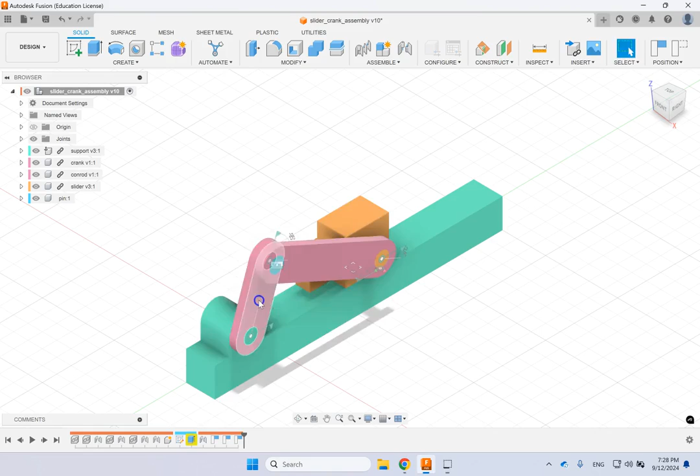Hello everyone. In this video we are going to look at assembly in Fusion 360, and to demo that I have chosen a slider crank mechanism here. This is the crank, that is the conrod, that's the slider, and this green member is the support, and I have created a pin afterwards, and this is the motion of this mechanism as you expect.

So clearly the crank is capable of spinning 360. The conrod spins and moves, and the slider only has one motion along the y-axis.

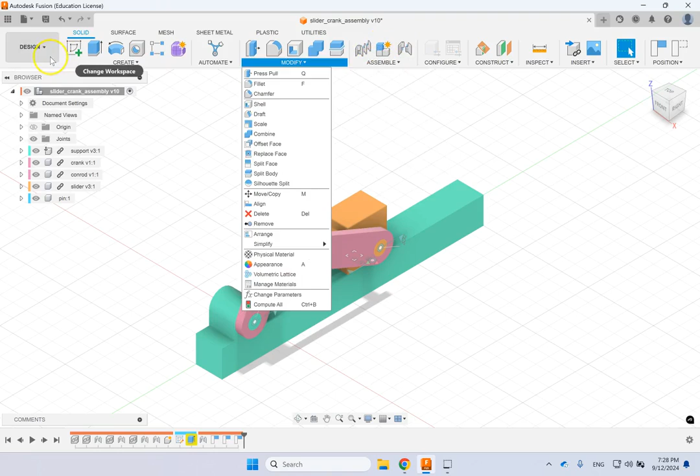So if I want to create this assembly, as you know, in Fusion 360 there is not a separate tab that you see up there for assembly. Assembly has its basically toolbars, one toolbar within the design. So you don't have assembly here, you don't have assembly up there. As I said, it's within the design. So how do we do it?

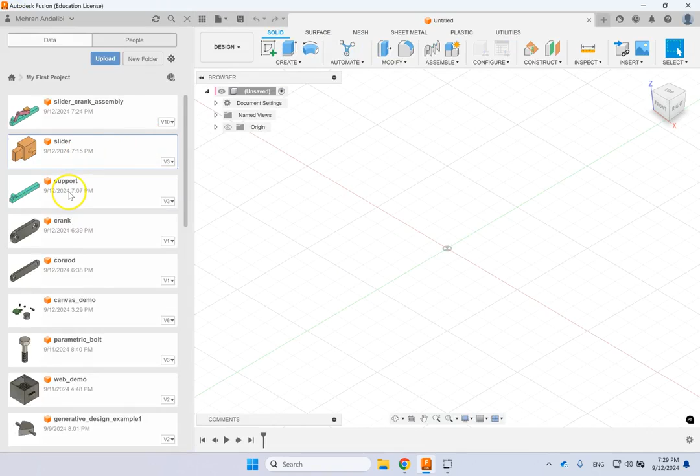In this case, let's say that I made the components ahead of time. So here are the components that I made. I made the slider separately, the support separately, the crank and the conrod, and now I want to put them together. The first thing is to insert these components into a file so I can assemble them.

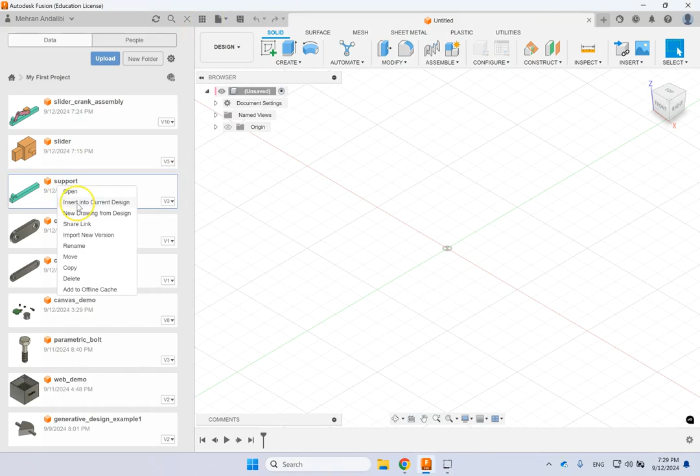There are two ways you can do it, either from your cloud here, this data panel. You can right click on the part and say insert into the current design, and it brings them into here just like that. Here you can use the transform tool or move copy, and you can move them or rotate them and put them anywhere that you want.

So let's say I did that, and you see that is added as a component, and next to this component there is this anchor sign, which means that component is fixed to the background. So now if I click on this guy and try to move, this body cannot be moved. So this body clearly cannot be moved.

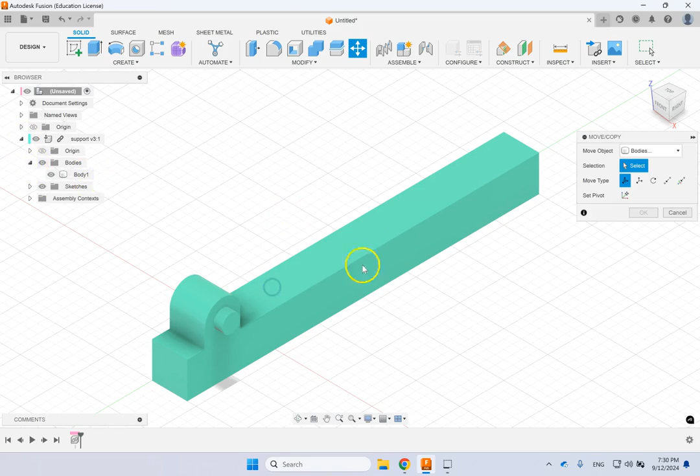If I go here, that is, this body is completely fixed, and that's because it's the first component that you inserted. But if you want, you can right click on it and use this option, says unground from parent. Ground here means anchor, fix - in SolidWorks we call it fix. Unground means float it. So now this guy should be movable.

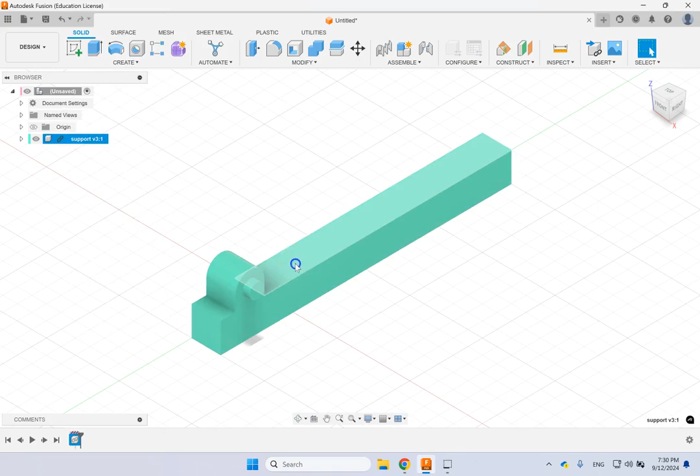But if you ground it, then it's not going to be able to move, and many mechanisms typically have a fixed part. So here I ground it back, and now this is not going to be able to move. That's one way to bring the parts in and fix or float them, or ground and unground them.

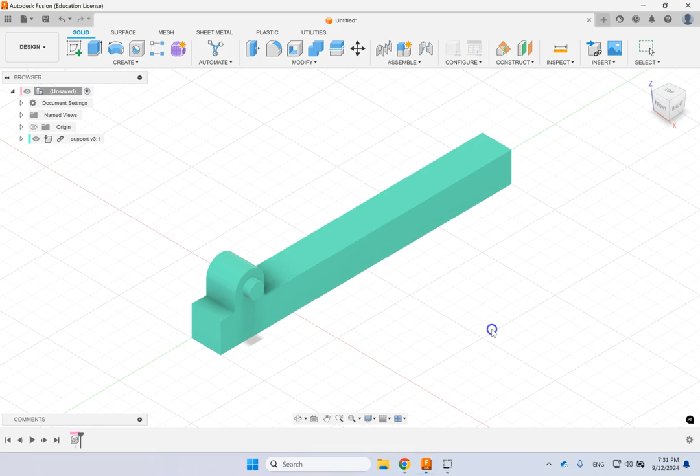The other way is to go here under insert and insert a component. Then it goes to basically your list of the files that you have, and here let's say I want to bring the crank, so I bring the crank, and it allows me to move it and place it somewhere appropriate like this.

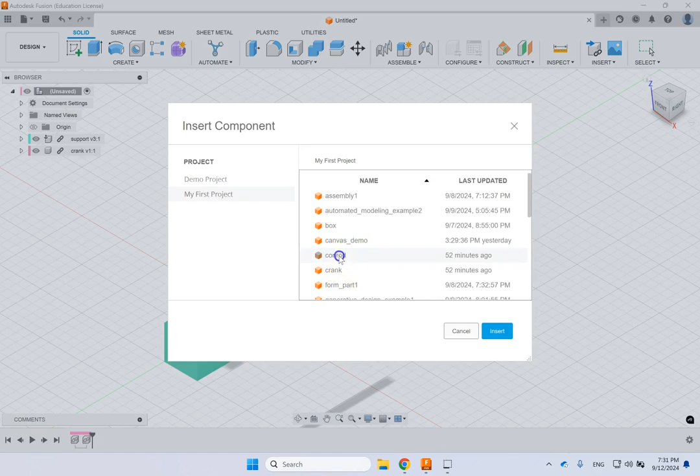And then I can also go ahead and bring the other one, let's say in this case conrod, and then I also have the slider. So let's hold down control - let's see if I can bring both of them. If I hold down control, can I bring both? Seems like not, you're doing it one at a time.

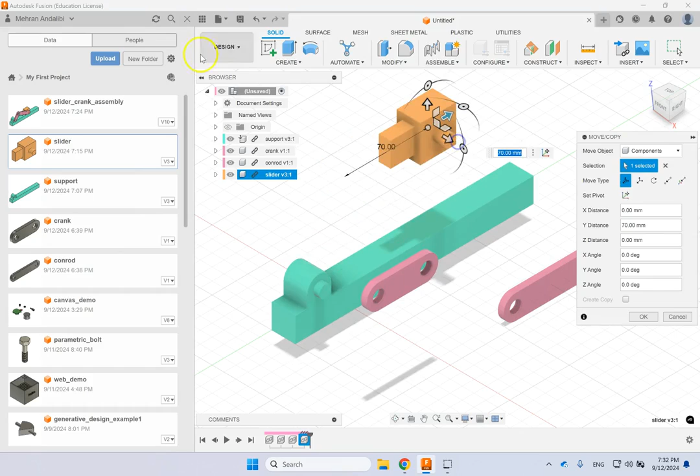So that is the conrod here, and let's just repeat that, I bring the slider through this method again, insert into current design. There we go. So I brought my 4 components here, and I'm ready to assemble them together.

Okay, so let's just start with the crank. So we go under assemble and we apply a joint. We create a joint, a revolute joint between this hole here and that kind of pin, and we allow the relative motion between them. So we click on joint.

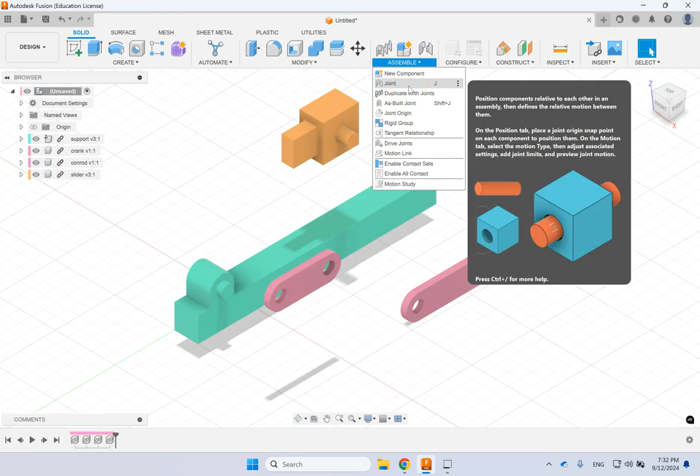First we go to motion and pick the type that we want. There is rigid, which fixes 2 things together. There is revolute, there is a slider, there is cylindrical, pin in the slot, planar, and a spherical or ball joint. So here we want the revolute, go here, and then I pick the front of this, and I pick the front.

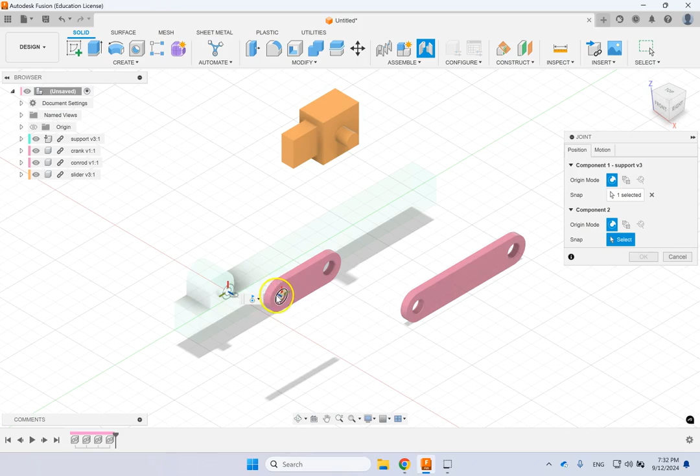You see there are different places that you can pick that side or this side of basically this pin area. So you can pick here, I pick this, so it also makes those coincident with each other.

And I guess that's all I need to do. If you do flip, right, you do the anti-align, and that's not what you want in this case. And the origin mode is simple, although you can do between faces and intersection and so on.

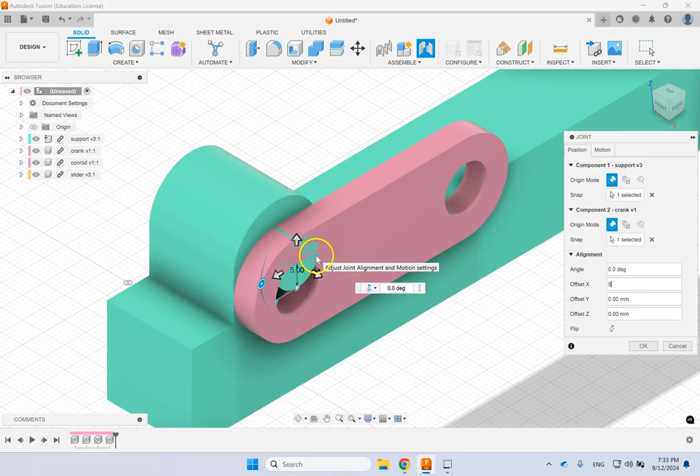You can give it an initial angle here. Right now there is no angle. You can even give the surfaces offset. So for instance, if in this case I say along X 5 mil, you see now it moved up and down. Or no, I say give it an offset along, let's say Y, right? And if I say give it an offset about Z, Z is the axis of the pin, right? And if I wanted to get out, I say -5.

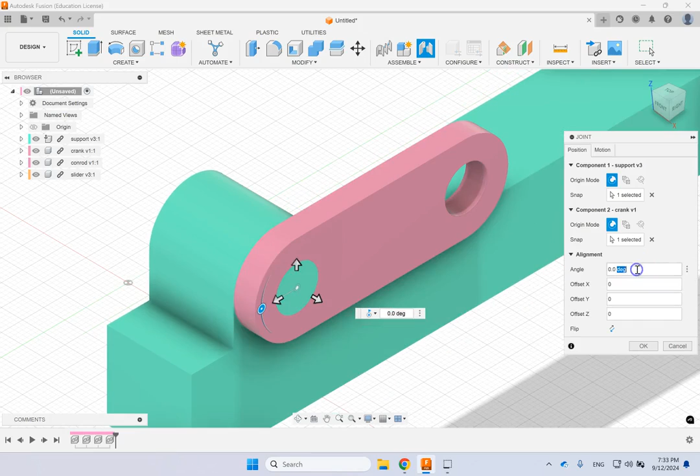So I can do all of that, and I can also give it a rotation. Say I want 30 degrees, okay? And there is 30-degree rotation. So I can do all of that. But since we can move it later, I'm fine with that. So now the crank should be installed, and you see that as you drag it and move it, it does properly move.

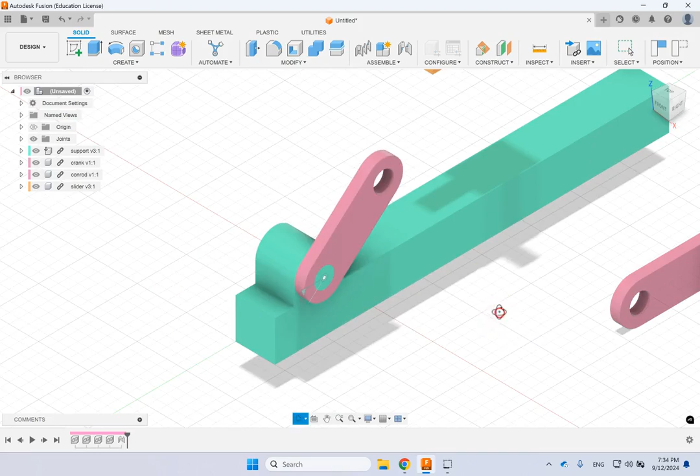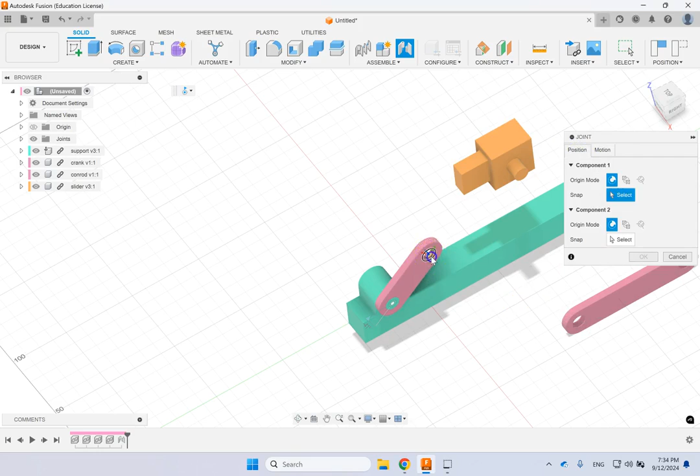Okay, so this is the crank. Now we go for the con rod, and we do a similar thing here. Again, we go ahead and click joints, and we go to motion. It's already on Revolute, the last one. And this time we want the front of this hole on the crank to match this back hole here on the con rod. And we okay that, and there we go. You see now it is also pinned down, and the motion is what you expect to have.

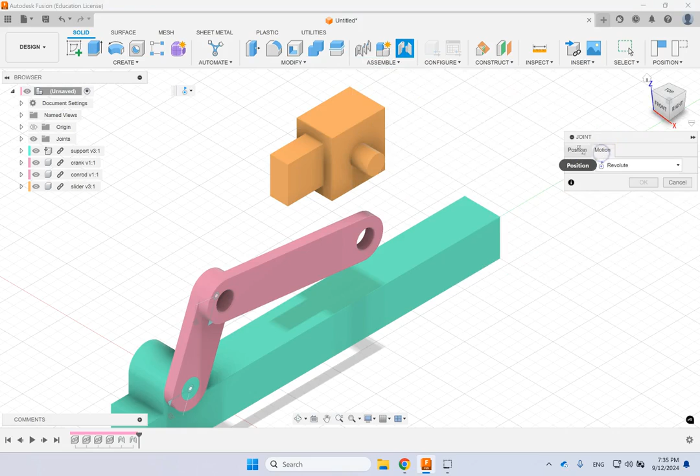Now we go for this slider, and again we need one extra revolute joint. So here we go, revolute, and this time we pick this and this, and we okay it. There we go. So now this should move with it.

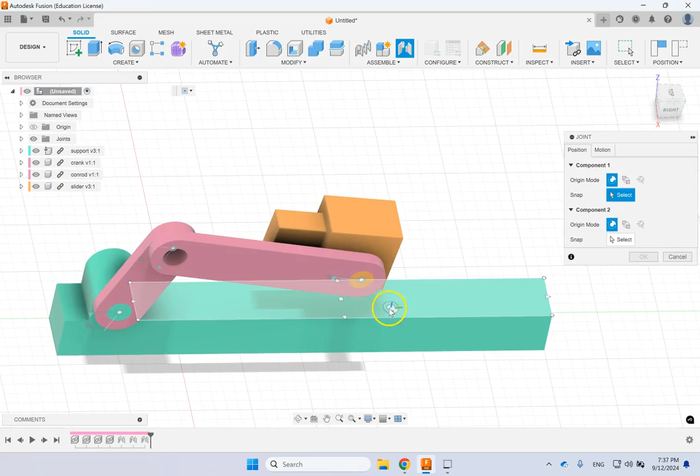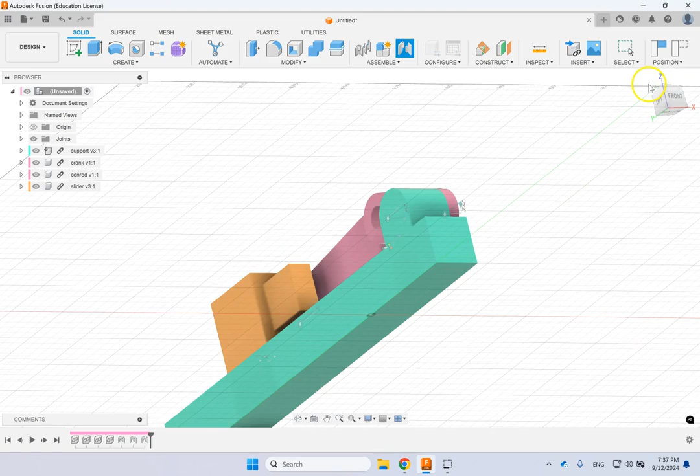The last thing we need to do is to apply a planar joint, which is between the bottom face of this slider and the top face of the support. So between basically this one and, let's see, it allows me to pick it. There we go. Let's see now. It doesn't crash or anything.

There we go. So now we should be able to show the slider crank motion. There we go. Okay, so here we put the slider crank together. Now, of course, we don't have a pin here, and it's a good idea to add a pin.

The thing we have done so far is called bottom-up assembly, which is creating the components individually and then bringing them and putting them together. Many times it's advantageous to do top-down assembly, which is creating the parts inside the assembly while you are still seeing other components and can use their sketches and entities.

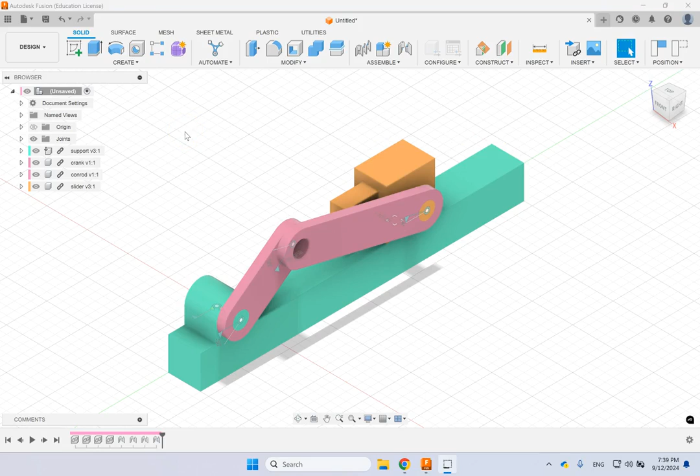For instance, if I want to create this pin, I don't need to close this, go open a new file, make a pin, and then insert it here. I can do it right now. And to do that, you just go under create and say new component, and just give it some name. So I call it maybe pin 1 because I already have a pin.

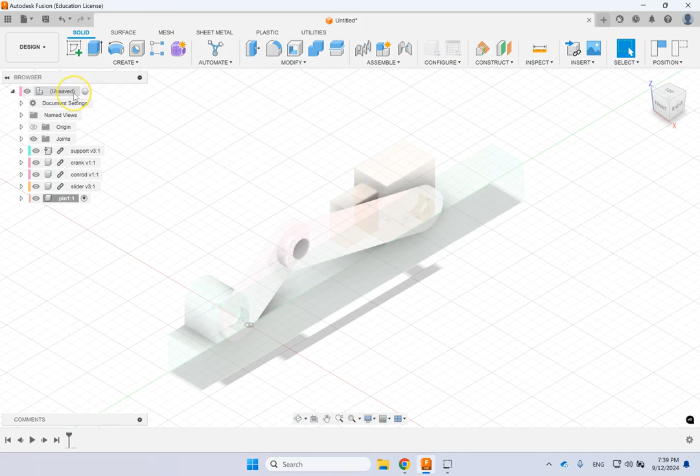And okay that. And now you see that when pin 1 is created, the rest of the assembly kind of becomes transparent and becomes inactive. So this transparent means these are inactive because this component is the active one. Whatever component has the circle and dot, that is the active one. If I want to go back to the total assembly, right, which in this case is unsaved, I can just click here, and now you see the whole assembly becomes active again, right?

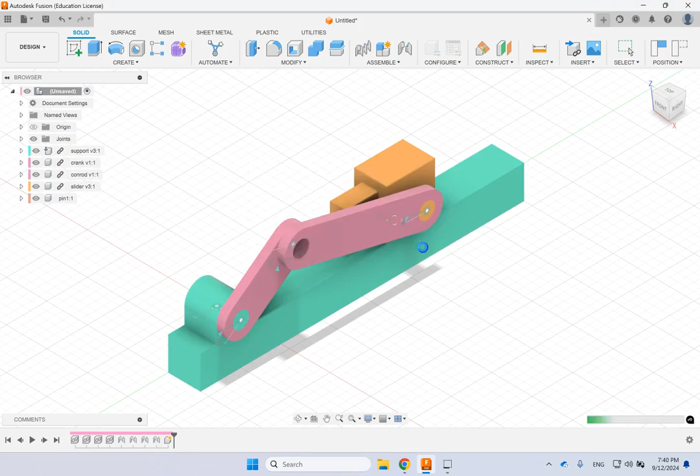Or if I want to make this one active and edit that, I just click here on edit in place. I just click on this and basically edit that in place, right? So let's say, for instance, I want to edit the support. So I click on this, and capture position means stay where you are, okay? I okay that, and now you see I'm in the support part.

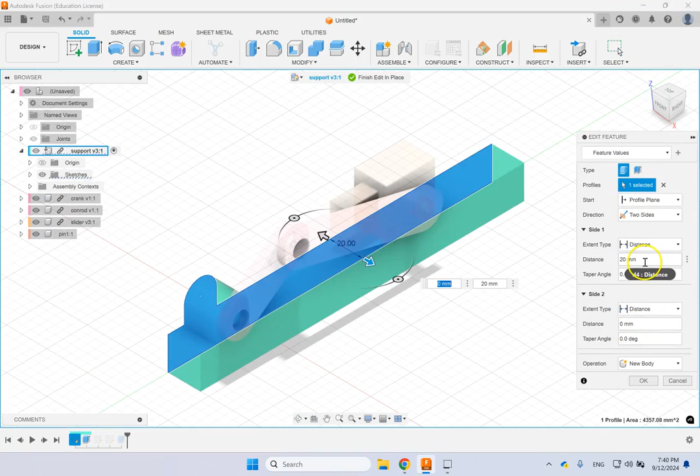And let's say I want to make this guy maybe a little bit wider, so I go to edit feature. You see on one side it was 20, so now I make it like 25. Okay, right? And then once I'm done, okay, with that, I can go back. So the support is made and finish edit in place.

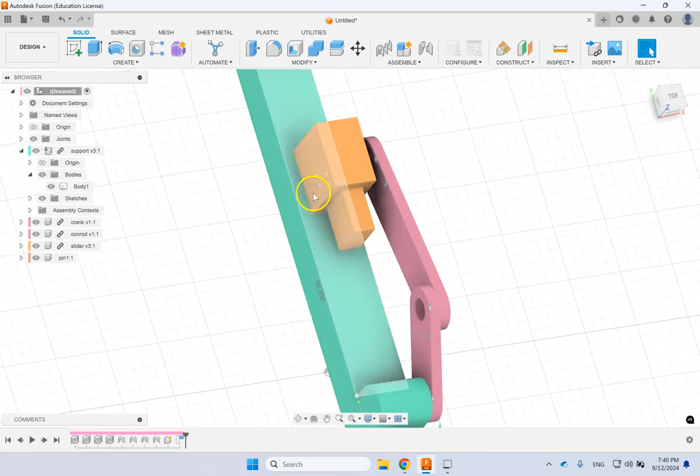Now if you look, last time the end of this was flush with here. Now I have an extra 5 mil room, right? Because I edited that in place. And let me save that here. I just call it temp because I already have this.

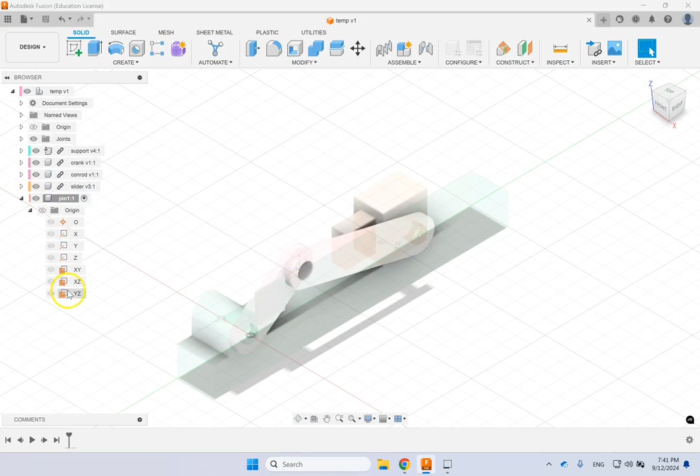And now, as I said, I showed you how to do edit in place. For this one, it's still empty, it's blank. I have to create it. So I click here, make this active, and then go inside of it to be able to create it. So let's say I go to this YZ plane and start to sketch.

And this is the part that I'm talking about, the advantage. So if I need to make a pin that is the same size as these circles, these circular holes, okay, I want the same diameter, okay, and here I'm not going about any tolerance right now.

So instead of drawing a circle and measuring those, or knowing the diameter of those, and making sure the diameter of this circle for this pin is the same as those, this is the better way to do it. I click on this circle, I can pick.

You see, I can pick all the edges or faces or anything of those previous components. I pick this guy and go here to create, and then I project it, just like that. And this time I keep the projection link. Why? Because later if I decide to make that pin a little bit bigger or the hole bigger, automatically this pin will also get bigger as well.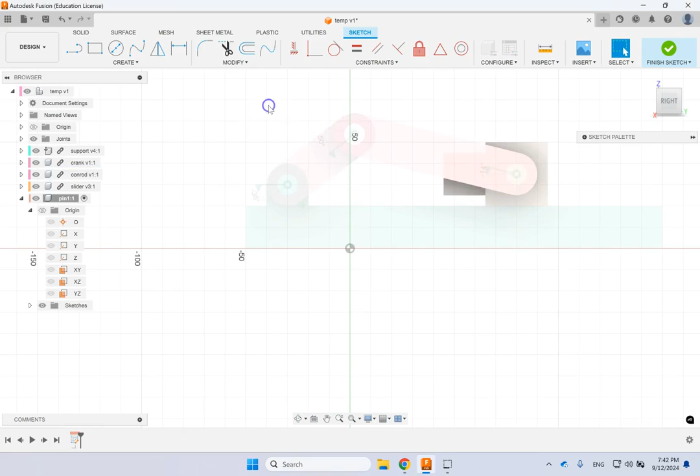Do you see that? Now in this case, since I want to use it on this guy, it's better to do that, although they're all the same size. So this time it's better to project this one, right? And keep this projection link, so any modification to these holes will automatically change the size of the pin. There we go, that's all you need.

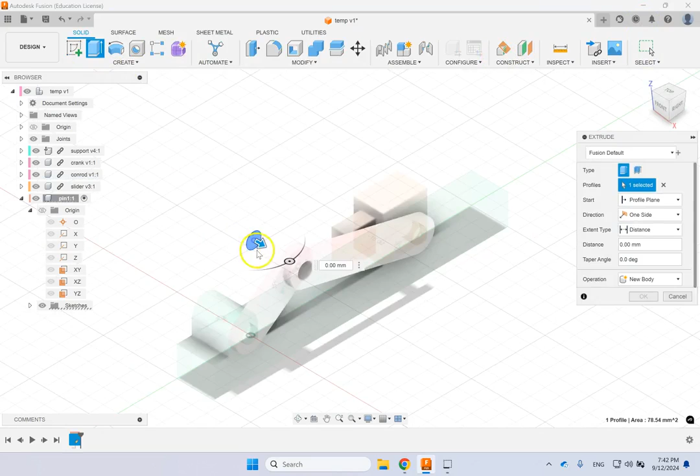You got the circle, and now you extrude it, and this extrusion should be 10 mil, and we okay that, and I'm done. That's all I needed for the pin. Now I click here and go back to temp and make it active, and now the pin is also there. As simple as that. This is called basically top-down assembly, or creating parts within the assembly.

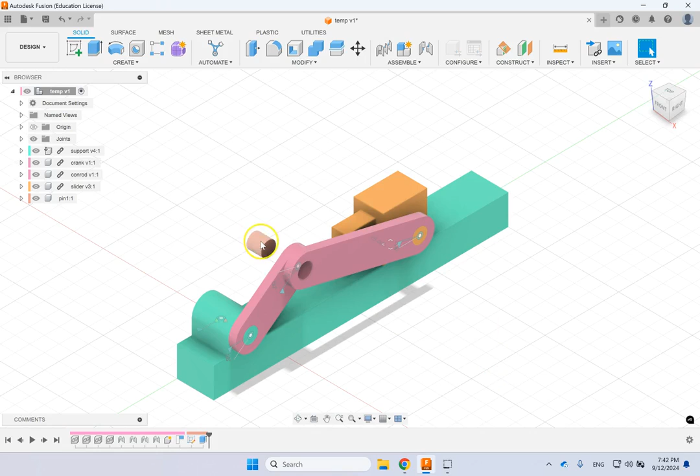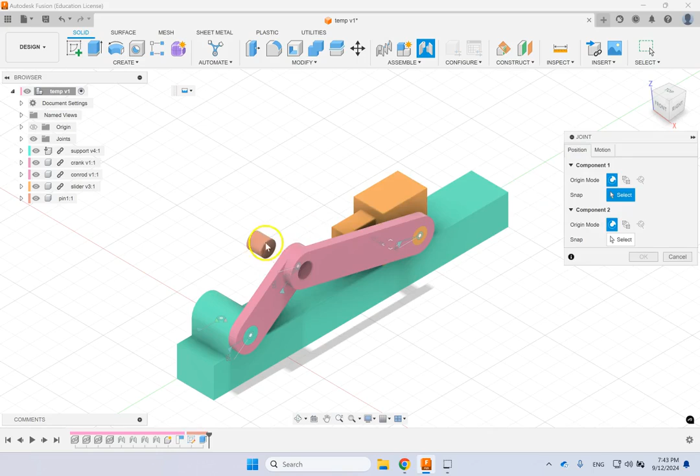Now that I have this, it's time to basically assemble that as well by a joint. Now this time I do not want this to spin necessarily within the hole, or I can. So one thing I can do is, instead of planar, this time I use a rigid joint. And then I rigidly attach this pin to the conrod, like that. Okay? And I okay that.

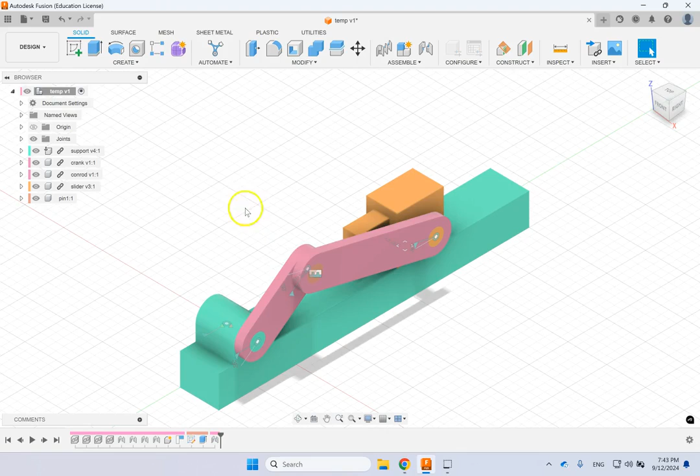And you see there is E next to it, that symbol is not really E, it's a rigid, but it looks like an E. So that is a rigid joint, that's a symbol of a rigid joint. So now if I spin this, the rotation of the conrod and the rotation of that pin are going to be exactly the same, because those two objects are rigidly connected. There we go, so we are done.

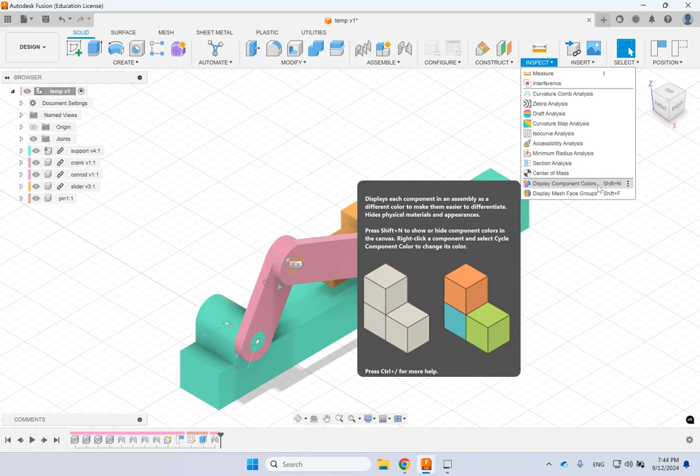Now, a few extra things to make this video comprehensive enough. One is, when typically you bring the components first time into the assembly, if you did not apply different colors for them, then all of them will kind of look gray. But if you want, you have this option here. Let me show you under Inspect. It says Display Component Colors. If this option is active, then it will automatically apply different colors to different components, so you can distinguish them.

If this is not on, look, then they all look like this. They're all gray. So when you bring them in, if they're all the same color, go ahead and do a Shift N. And there we go.

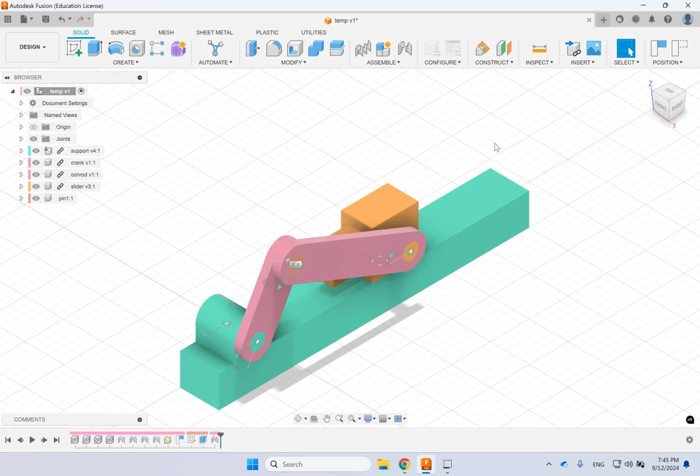Okay, what else? One of the things that is important in assemblies is checking for interference, whether the parts are penetrating into each other and they have overlap or not. Now, in this case, you might say, what is this extra thing that you made? I deliberately made it so when you bring this guy back, that extra protrusion will get into the support. As you can see right now, there is right now interference.

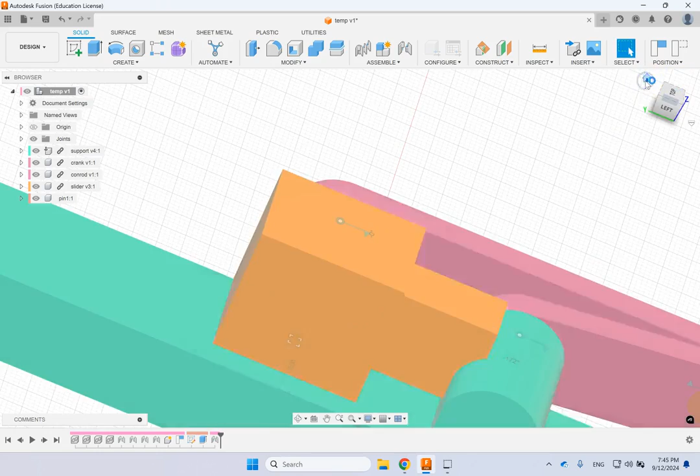So I wanted to show you how to check for interference. So right now, in this position that there is interference, you go to Inspect and check for interference. If it says capture position, means do it in this position. If it says revert position, means put it back to the original position. So you see, if I go revert, it goes to what you started with, not after you brought it all the way back. So you can always apply a capture position or revert position. And in this case, I do want to do it in capture position, so make sure that in this case, you do it in capture position.

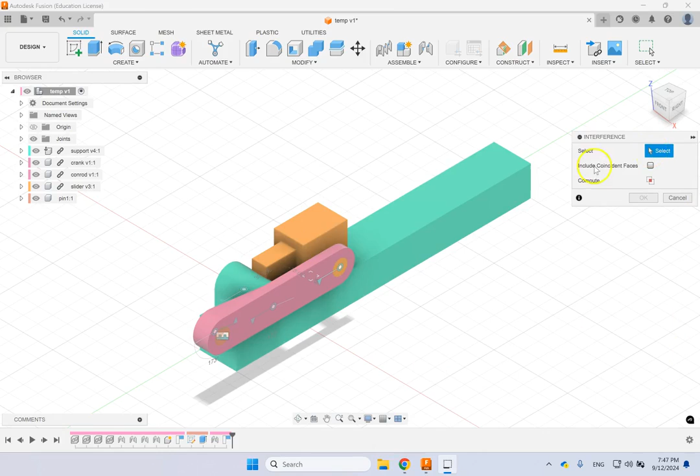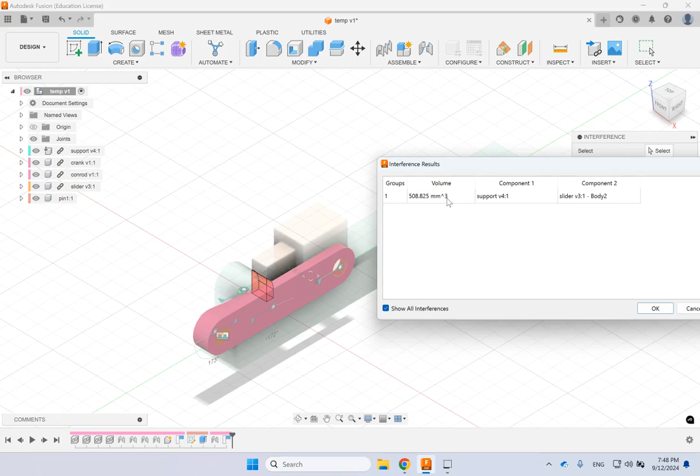And then let's go ahead and find the click on the objects we want to check interference. Now be careful here, this whole thing is one single object, so it doesn't matter where you click. So I click here. For this one, you see it has two different pieces. So if you click on this, there will be no interference. You have to pick this part. And now you say compute, and there we go. You see here, it found an interference volume for me, and it even gave me the volume of it. You see, there is interference in this case, and that's no good.

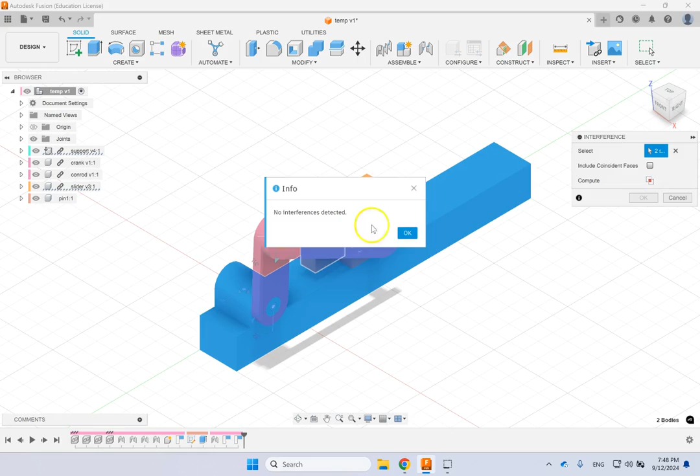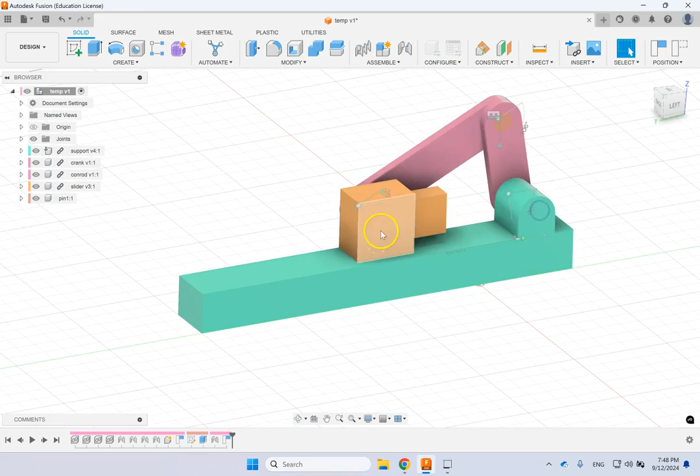Okay, but if I move it to another position like that and redo the exact same thing between these, it says no interference. So this is one thing I wanted you to see. The other thing you might ask is, wouldn't it stop the motion when there is interference? The answer is no, it doesn't. Look here, if I move this guy and it penetrates into the other object, it is not going to stop my motion.

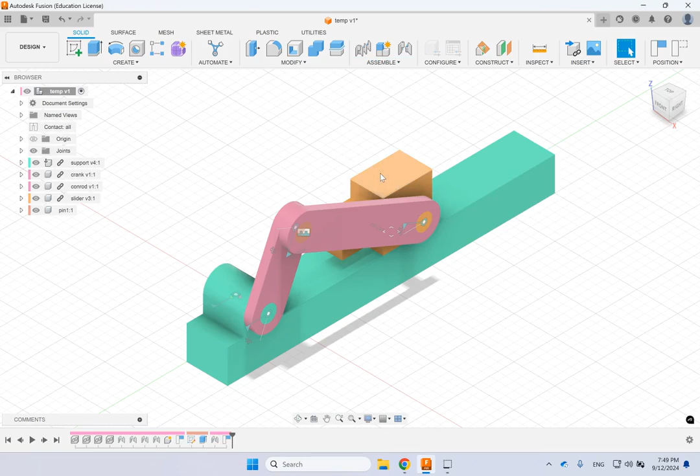So you might say, is there anything you can do so when there is interference, it does not let you move? The answer is yes. Under Assemble, if you activate enable contact sets, or all contacts, then everywhere you see a contact, it will go ahead and stop the motion.

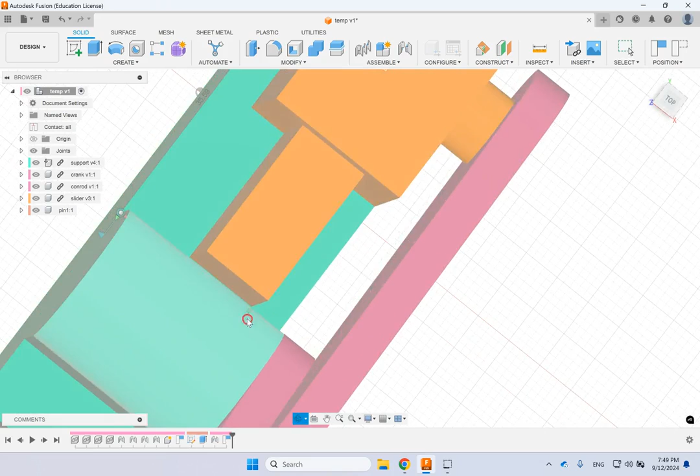So now I grab it and try to move it again. Let's grab this, now look here. As soon as I reach the area where those two faces become tangent, let me use a top view. You see, they're reaching, and it does not let me move anymore. Look, this is the maximum. I'm really trying to use my mouse and move this forward, but it doesn't go any further because I enabled all of the contacts. So this is like my mechanical limit - these are like mechanical locks on the motion, and they do not go any further than that.

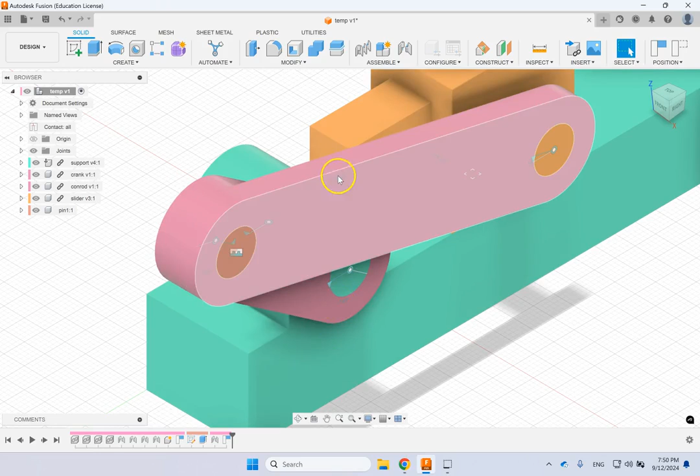One of the good things about it is it shows the values of the joint. So it says this joint is rotated 158, this one is rotated negative 146, this guy moves 35, that one the same, negative 15. So all of the joints you have under here, it can show you their joint variable values as you move, doing real-time computation of joint variables, which is really powerful. So if somebody asks what is the maximum angle the crank can go, it's 158 degrees - it cannot go any further. You don't need to do any measurement, it's already there.

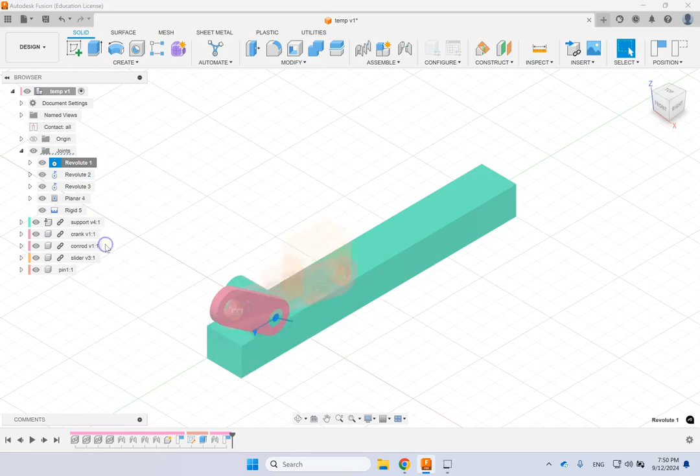By the way, any joint under Joint, you can right click on it - you can edit it, delete it, or click to animate the joint. Now for this joint specifically, it does this crazy thing: it fixes this member and rotates the other one because the order that these two members are selected is basically backwards, but you can always fix that.

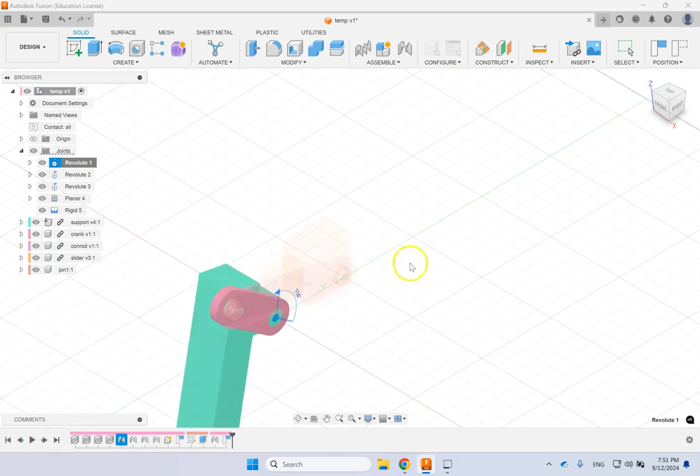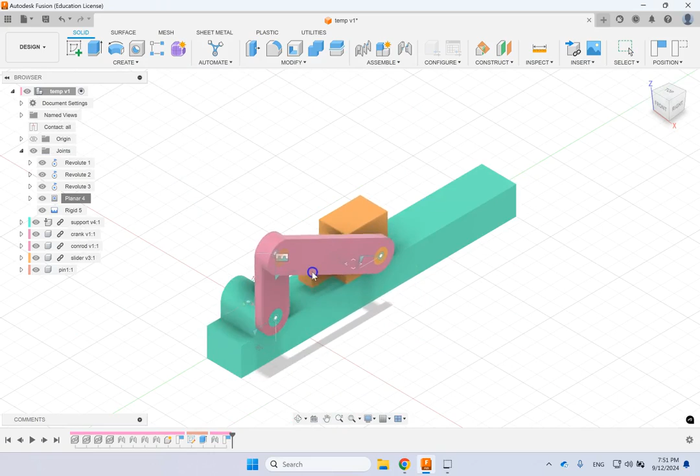So let's say this is the one, or if you want, let's look at this - let's animate this. And of course, when you do an individual one, it's not so super meaningful. So can I get this to create a nice animation or motion for me? Yes, I'll show you that one as well.

But before that, a few other things about the joint. If I click on this revolute joint, a few other things you can do, other than suppressing it and so on - one of the things is the drive joint. Drive joint basically means I specify an exact value for the joint variable instead of just manually grabbing it. Let's say I want to put the crank at exactly 60 degrees. How do I do that?

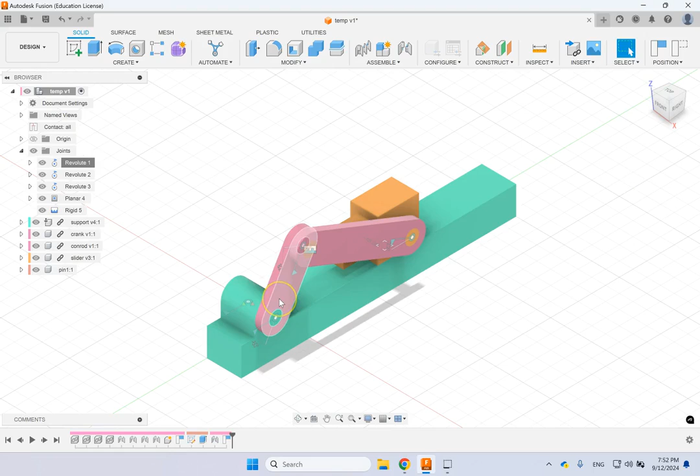I click here and it says, okay, you pick that joint, fine - how much do you want that angle to be? Let's say negative 60 degrees or 60 degrees, right? So that's 60, and I say negative 60. There we go - you see, it exactly takes it for me to the 60-degree angle. So that is one thing: if you want to go to a specific variable, you can do that.

The other thing you can do is lock a motion. If you lock a joint, then the joint basically becomes like a rigid joint. Now in this case, I cannot lock anything because I only have one degree of freedom, and as soon as I lock a joint, nothing can move.

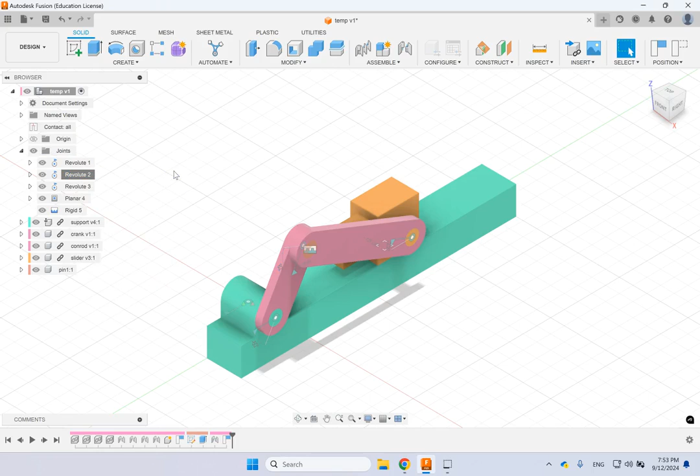So we can try it - let's say lock this middle joint here. If I lock this guy and now try to move, you see nothing moves. So this lock joint is good in systems with more than one degree of freedom, when you only want to look at the effect of one of those motions and not the others - like a robot, or a planetary gearbox, or anything. So locking a mechanism with only one DOF, if you lock any of them, you're going to make it a structure. So pay attention to that part.

Another thing you can do is put limits on the joint motion. So here you see I have edit motion limits. Right now there is no limit for how far this can go.

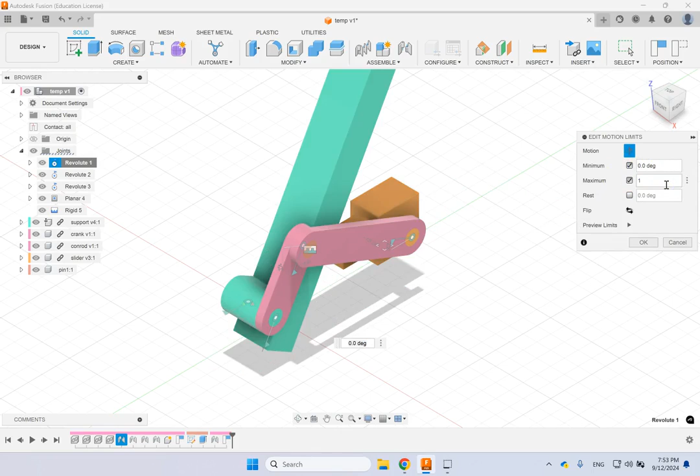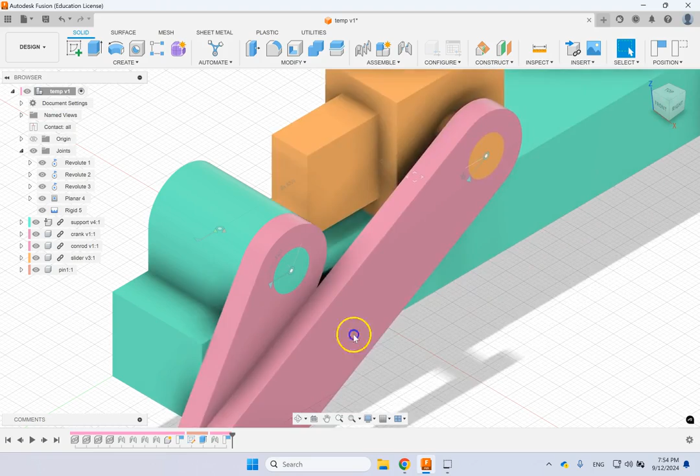It can go full 360, but let's say I only want to go from 0 to 120, no more than that. Okay, if I apply that, now look, it doesn't go up because that's the 0 angle. And if I grab this and move it down, all it can do is go to 120, and then it locks. So you can put joint limits on the joint as well.

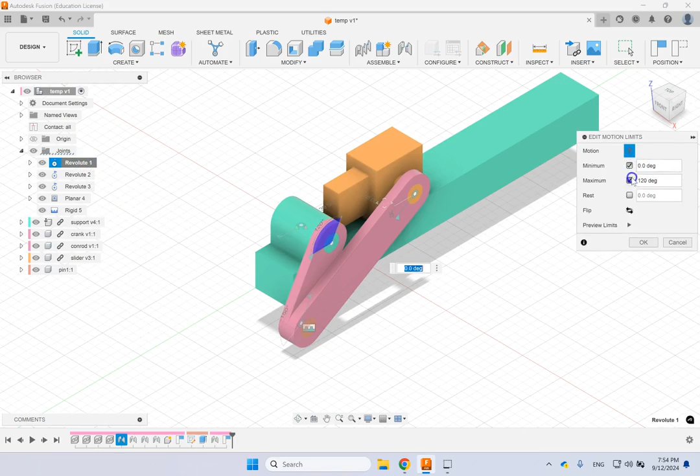Or if you're done with it, you can go ahead and undo those. Now this joint has no limits, so it should again be able to fully move. Let's see, there we go. Seems like those limits are still there. Let me apply that, I guess I forgot to apply it, so now there we go. Now I should be able to fully move.

Okay, so this is another thing I wanted to show you. Now let's keep moving. One other thing you can do is change the joint origin, or pick the joint origin if you want, which is not super necessary right now.

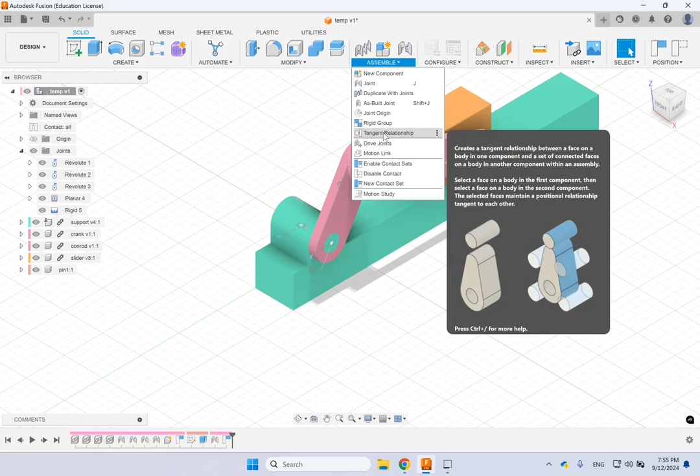So if you looked at the joints, there is nothing for contact. There is rigid, revolute, slider, cylindrical, pin, slot, planar, and ball. But if you have, let's say, a cam and a follower which only have simple contact, then you want to use a tangent relation. So this is good for those cases.

And then there is another one called motion link. This is when the motion of one joint is related to the motion of another joint. In this case you don't want to do that, because, for instance, the rotation of this crank and the X or Y motion of this block are related, but not through a simple relation—through a lot of trigonometry functions. So in this case it's a little bit more complicated.

But if you have more than 1 degree of freedom and you want your second DOF to be a function of the first DOF, then what can you do? You can basically use motion links.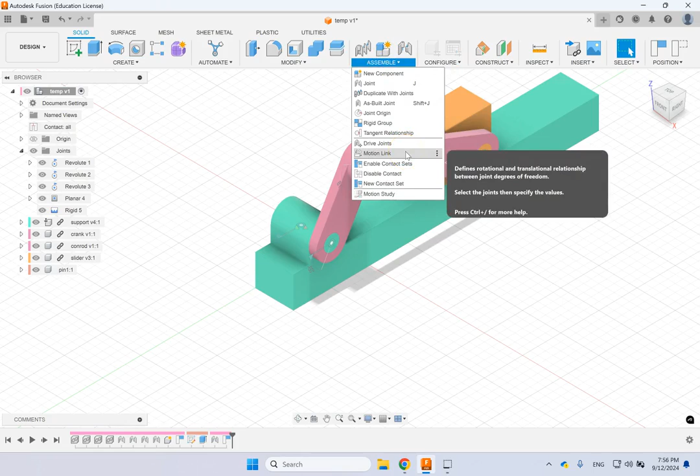Okay, and finally I want to show you this one: motion study. This is probably what you have been waiting for. So here we click on motion study, and here we can move a joint and create an animation. Let's say I want to look at joint 1.

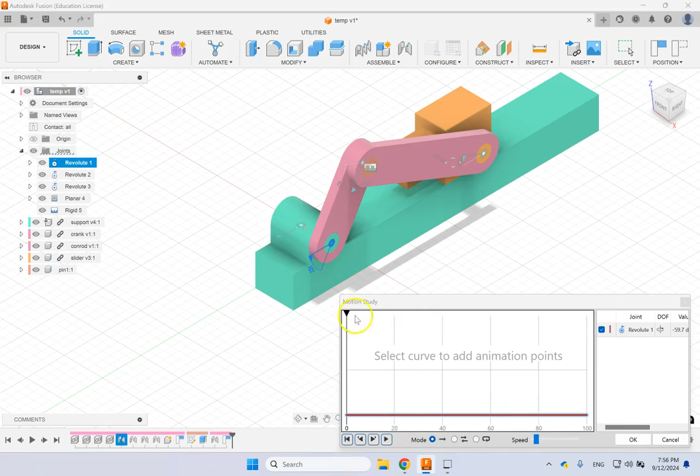So I pick joint 1, and these are basically from 0 to 100% of the animation, and the y-axis will be the values of the joint rotation. So here you manually create the revolute joint motion versus percent of the animation time, then you can change the speed, and select which mode you want for the animation—one way, forward-backward, or loop—and then play it.

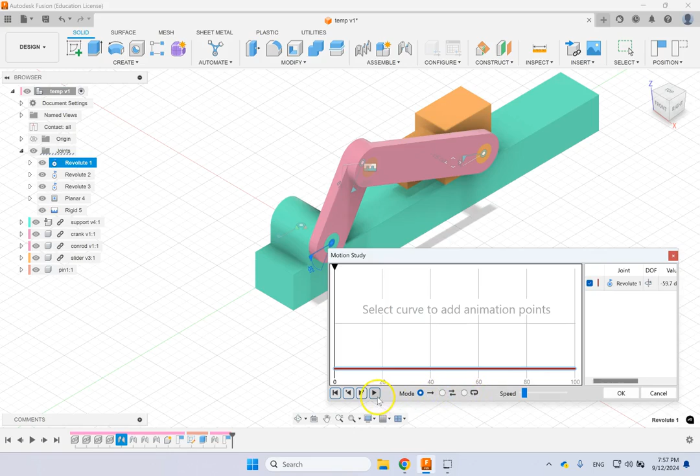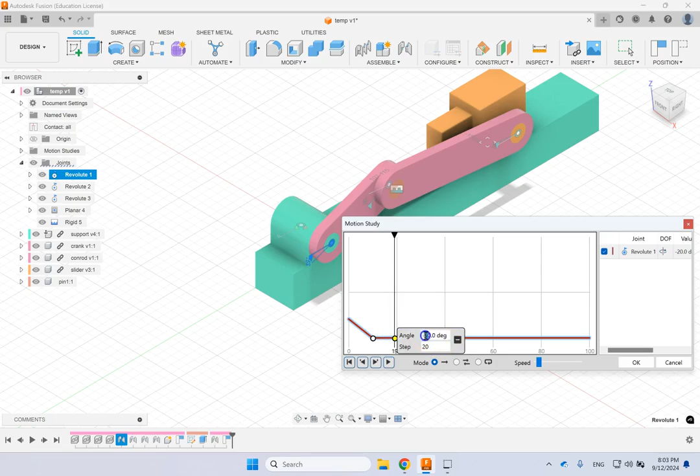So here you click on this point, and let's say at step number 10 out of 100 steps, I want the angle to go to negative 20 degrees. There we go. And then at step 20, I can modify it—I want to go to negative 40 degrees, and you enter, and you can keep adding all of this, and so on and so forth.

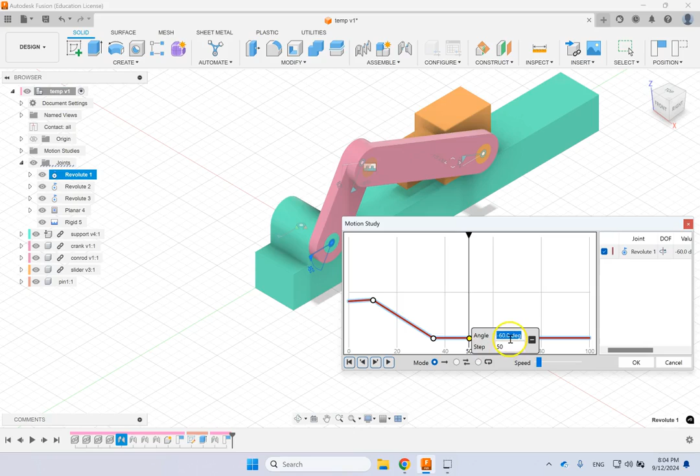Let's say at step 50, I wanted it to be at negative 60 degrees. And once you're done—seems like one of them I didn't do, that's fine. You have to click outside. If you do this and don't click outside, then it's not going to be effective.

So something like this, and then maybe at step 85, I want to go to negative 160. And finally, at this very last step, I want to be at negative 180. Okay, so you manually create the curve, and now you're ready to go.

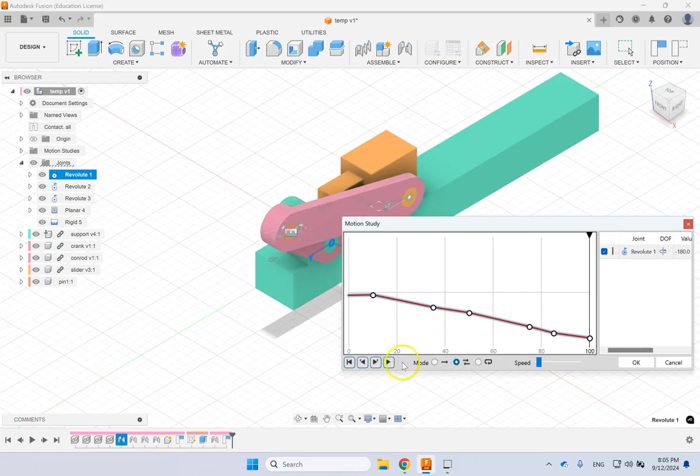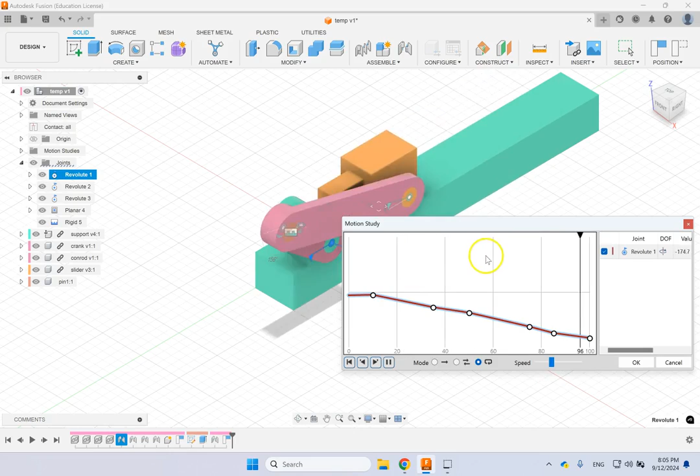Let's go ahead and play it. And you see that it does it. And if you want, you can put it in two-way mode like this, so it shows forward and backward motion, or you can put it in a loop—here it just keeps going in the loop—and you can also change the speed of the animation. Now it's a very simple motion study, but it can still show you the purpose of the mechanism.